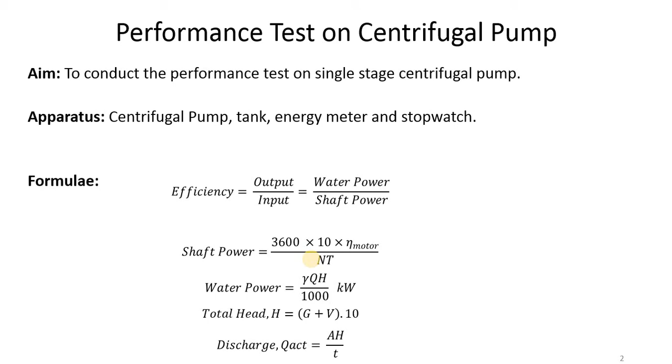The discharge Q actual is measured volumetrically by using the tank, and that is A into H divided by time, where H is a constant height, let's say 0.1 meters, and T is the time recorded to raise water to a constant height of 0.1 meter, and A is cross-sectional area of the tank.

Let us come to the test rig details. It's a very simple setup what we have here. There is a display board which consists of two pressure gauges. The first one for the delivery head and the second one is for suction head. Now we use these two pressure gauges to calculate total head. On the back side of this display board, you can see part of a centrifugal pump. We still have some more pictures to show you related to the centrifugal pump.

Now there is a valve here. You also have an opening, partial opening, through which you can do a process called priming, and water from the centrifugal pump will run through this pipe and discharge to this tank. Now in this tank we measure Q actual.

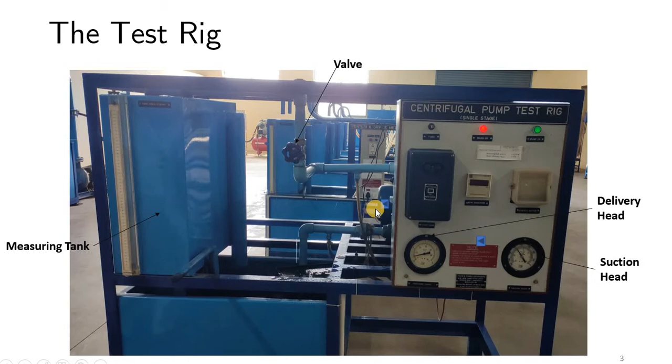Okay, the centrifugal pump. Now this is the side view of the test rig, where exactly here you have the display board, the centrifugal pump. This is actually the motor. You can see the motor here. Rotor and impellers are separately placed. They are in parallel combination. This is the impeller where you have a development of suction pressure or vacuum pressure. Now there are 2 points to which the pressure gauges are connected, one on the delivery pipe and the other one is on the suction pipe.

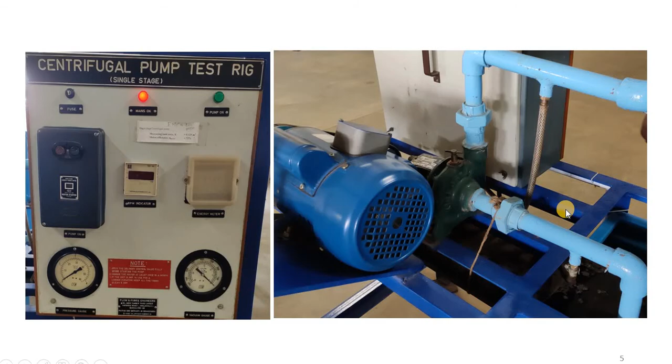Okay, some more things related to the pressure gauges. A pressure gauge tapping can be seen on the delivery pipe. There is also one more pressure gauge tapping to the suction pipe. So we use both of these details to calculate total head. Now there are some calculations needed to calculate total head.

The delivery head is calculated by using this pressure gauge, and this pressure gauge will directly give you the values of pressure in terms of kg per centimeter square. That means the value of pressure is in terms of its intensity scale, whereas for a suction pipe the values are given in terms of millimeters of mercury. That means it is in terms of head of mercury.

So this value, once you record it, you're supposed to convert it into millimeters of water, equal amount of heads of water, and then back to kg per centimeter square. You add these two values, HD plus HS, and convert it to meters of water. So from kg per centimeter square back to meter. So it's intensity of pressure to its equivalent amount of head of water.

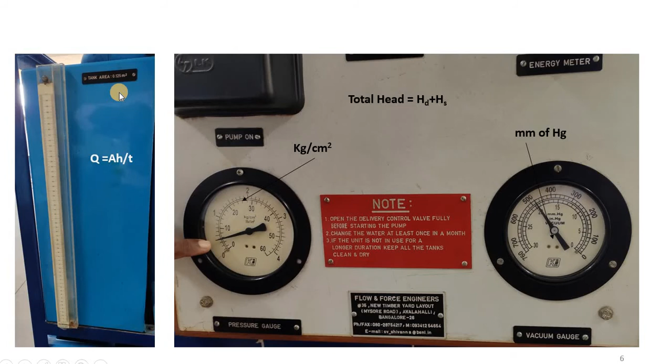So you can also use this formula Q equals to A into H by T to calculate Q actual. You have the usual measurements which are kept on one of the sides of the tank, and tank area 0.125 meter square can be directly taken from the observations.

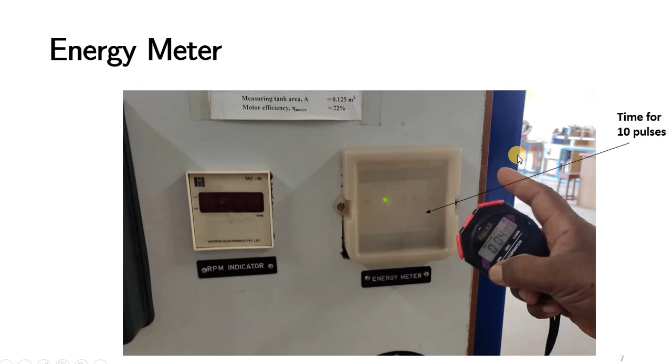Let us come to the energy meter part. Now we actually measure the time for 10 pulses by using a stopwatch. This is one pulse now. Similarly, we need to count 10 pulses, and that's how we have to record the time needed for 10 pulses.

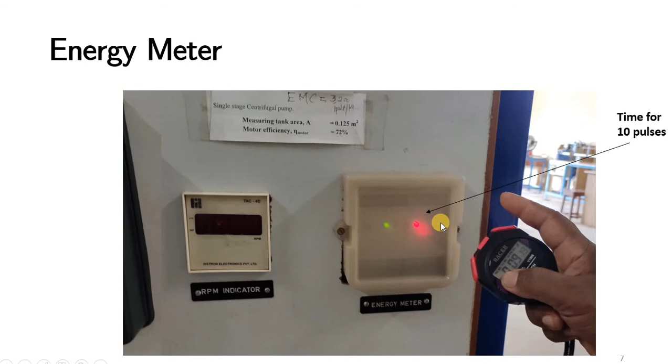So there are some more details related to the experiment. Motor efficiency equals 72%, and there is a constant, the energy meter constant, which is usually written on this energy meter, and it is 3200. Let us come to the observations part. The measuring tank area is around 0.125 square meters. This is the cross-sectional area, and the motor efficiency is 72%.

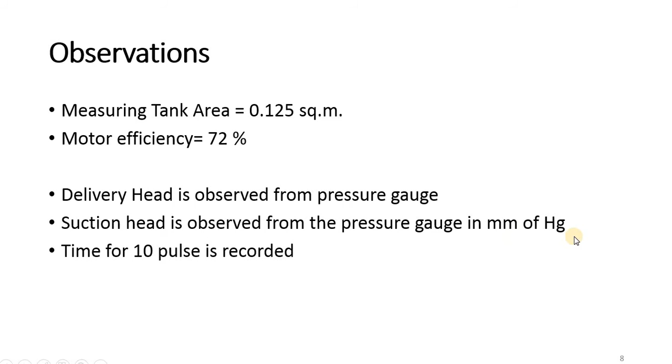Some more related information, such as delivery head, is observed from the pressure gauge, what we have seen on the left part, and suction head is observed from the pressure gauge, but it is in terms of millimeters of Hg, mercury. Time for 10 pulses is also recorded. Let us come to the tabulation part.

For the first trial, I'll try to explain to you the mathematics involved behind all these calculations. First, you measure or observe the pressure gauge reading, and then you adjust or record these values by using the valve, and the consequent values for vacuum gauges, and then time for 10 centimeter rise in collecting tank, and then time for 10 pulses are recorded.

Now 0.3 being the pressure in terms of kg per centimeter square, which is for the delivery head. The vacuum gauge reading for the suction part is recorded, that is around 480 millimeters of mercury. Now we are supposed to convert this millimeters of mercury to kg per centimeter square. How do we do that? 480 into 13.6 divided by 10 raised to 4, 13.6 being the specific gravity of mercury, and 10 raised to 4 is a factor to convert millimeters to centimeter square.

So it's around 0.65. Now total head is 0.3 plus 0.65. It's 0.95 kg per centimeter square, but I need the value in terms of meters of water. So a conversion factor is 10. You can use P equals gamma into H, a well-versed formula in this regard. So if P is 0.95 kg per centimeter square, the same thing in terms of meters is 9.5.